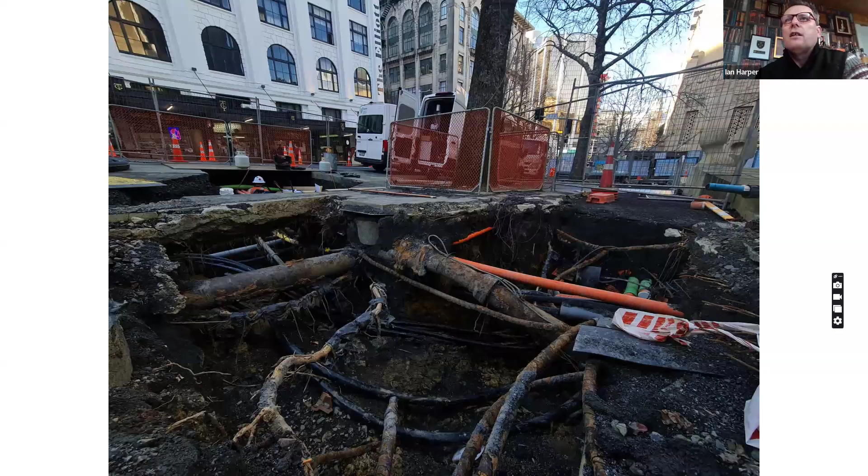So it's my favorite subject, and I did talk about this when I came over in October, but we want to talk a little bit more about it and a little bit more detail about underground services. It's the main job that I have in the UK. Most of my safety work is related to working around and near underground utilities and services in the UK. We have lots and lots of infrastructure that is under the ground, and it's increasingly difficult with the extra number of assets that we're putting into the ground to avoid them. And some can be extremely dangerous, such as electrical cables and high pressure gas, and cause lots of injuries. But also there's other services there that can cause just as much damage to other infrastructure and affect the quality of life of people in our cities, but also affect us commercially as well. So most of my work in the UK revolves around avoiding hitting and damaging underground services.

I think it's also important for you in Ukraine. I think as more assets are above ground, they could obviously be targeted and damaged, so it is important to ensure that they're safer underground. But we want to make sure that we don't damage services, because we want the utilities workers to be employed doing more productive work than repairing the damage that we're doing to underground pipes and cables ourselves when we carry out work. That's why I think that's an important subject.

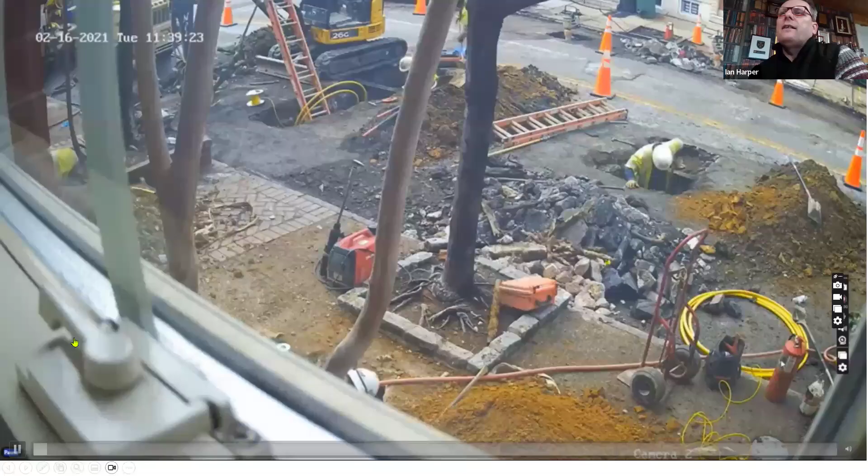I could show you lots of videos of people hitting underground electrical cables and people getting injured. I don't think there's any point in that. Some underground cables, underground services can cause injuries and burns, but often other service strikes can be just as damaging. So we have a short video here of a service strike, which doesn't look too dramatic to begin with, just someone digging a hole in the street.

You can see they've had some sort of incident, and it appears they've hit a water pipe. Very quickly it turns into an annoyance and becomes quite a significant incident. You can see the water coming up at various parts of the street. The worker looks quite angry, a little bit upset.

Not only do we have water that's going to flood some of the buildings close by, but it's also going to run down the street. I don't know what buildings might need to be evacuated, the costs involved, or the people relying on that water now. Maybe their taps don't work, or they don't have access to drinking water because we've damaged the pipe and it's becoming contaminated.

So it's not always about electrical cables and safety. There are other services that can cause damage as well.

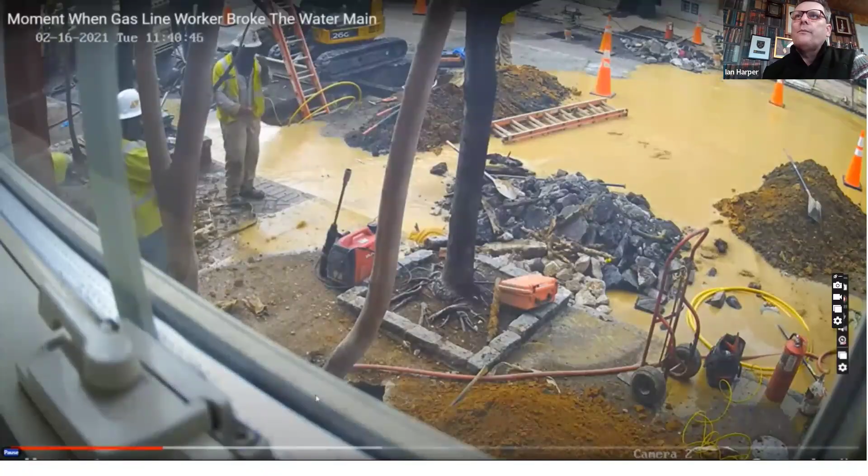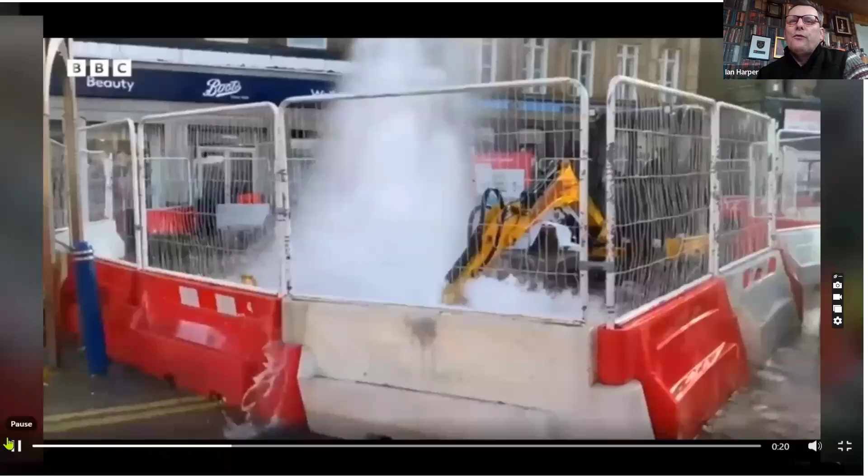This is one that happened close to me in the UK. You can see the amount of damage caused here, where we managed to flood a street. You can imagine all that drinking water is supposed to go to people's homes, but it's actually flowing down the street, and the amount of effort taken to make that water drinkable is wasted, as well as the damage it's causing.

It affects all the shops there, and those shops would probably close. It affects fire suppression systems, and even the ability of the fire brigade to fight fires, because the water pressure is adversely affected when we've hit the service and we're losing so much water.

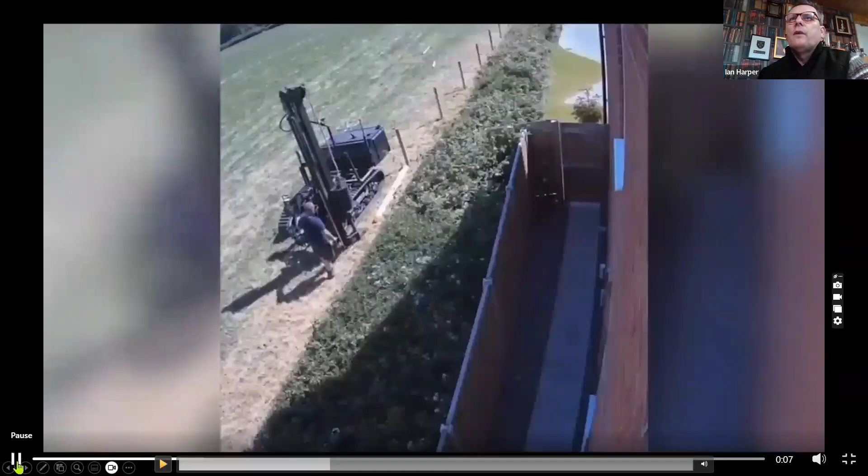This particular incident is quite a significant one that's just been prosecuted in the UK as well. A lot of people think this is about construction or building, but this is a farmer just putting a fence up in a field, and he manages to drive a wooden post through a high pressure gas pipeline.

That's quite a big explosion, and it required the evacuation of 30 houses. The emergency services and firefighters had to attend, and the whole village was left without any heating. Fortunately it was summer, so it wasn't a massive problem, but this was just a regular guy putting in some fence posts on his farm.

So it's not all about construction activities. It covers all types of industries. Anybody who does anything where you might put something into the ground can be affected.

From my perspective, working on behalf of development banks on occasion, when we hit services that has a massive impact on the sustainability goals I'm often talking about. These are the ones that are affected. If you damage services to a village, knock it off water, electricity, or heating, you have a negative effect on a lot of those sustainability goals.

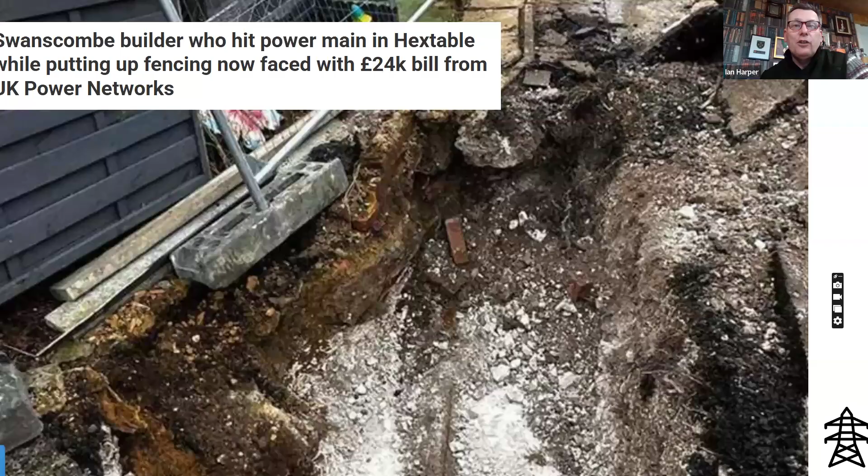So it affects everybody, whether you're doing big construction work or just small maintenance work on your property. Everyone potentially could hit an underground pipe or cable, such as this individual doing some work putting up fence posts. I don't even think this is a work activity - I think this is someone just on the edge of their property putting in a fence post.

So I quite like that, just the way he runs away, rather strangely. But notice it's not a big injury, a big incident, but it could have been a lot worse. Some fires and explosions from electrical discharges can be huge. And this guy's only wearing shorts and a t-shirt.

So in the UK, a lot of workers will wear special protective clothing when working around underground services to prevent people from getting burned if there is a bigger fire and explosion.

So what type of services are struck in the UK? Well, we get statistics in the UK of the number of utilities that are damaged every year. And by far the biggest amount of services that are damaged are underground gas pipes.

Now, the reason for that is generally because most of them are plastic. So later on, a lot of this presentation is going to be talking about how do we find these services, and plastic pipes are very, very difficult to find. So I think that's why most of them are hit.

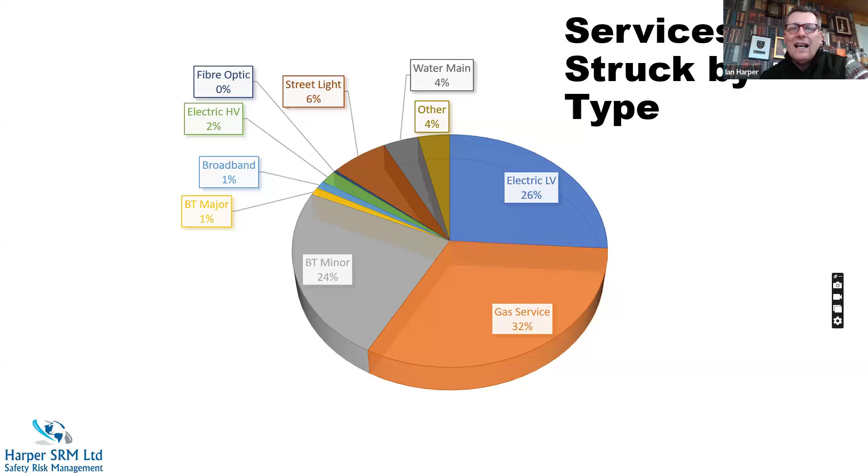So they've put it inside a duct to our properties. So we have a small plastic pipe that the fibre optic is installed to. So hopefully we can find that, but generally that service is very, very difficult to find and very poorly installed most of the time.

How are they damaged? Most of the time it's with an excavator or a machine. So excavators and machinery should not be used within 500 millimeters of a service. That's a rule we have in the UK. You find out where the underground pipe or cable is, and you don't put any machinery within 500 millimeters of that service. So that's one of the rules that we have, but often we don't know where they are, so we end up working too close to them and causing damage.

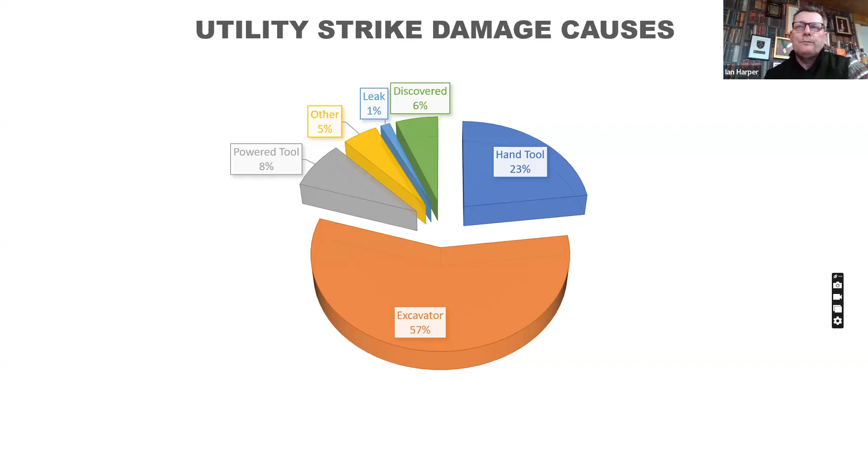And most of the time, we find that services that are damaged are not put in very well, and they're quite shallow, so they're not very deep into the ground. So, as I said, most services are damaged with less than 500 millimeters in the ground. So theoretically, we shouldn't be using powered hand tools or machinery when working near them. So that makes it really difficult if we're working in a high street environment. How do we then cut the concrete or asphalt above the cable to do some work on it?

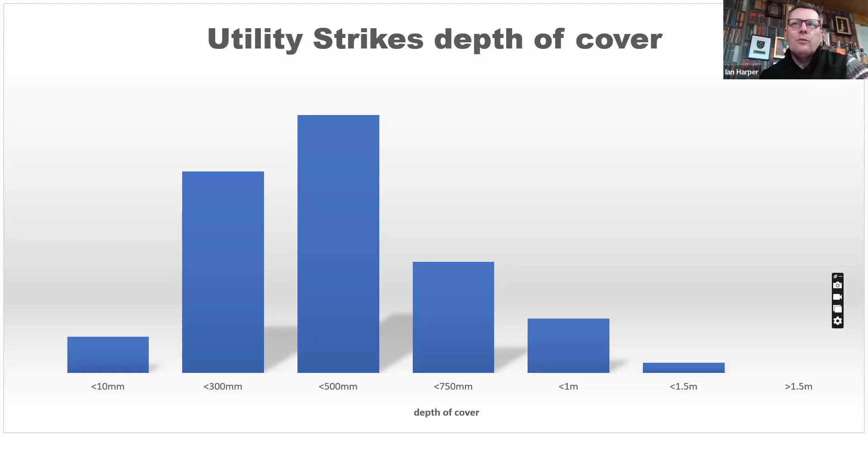And we have about 30,000 pipe and cable damage incidents every year in the UK. So we have lots of statistics. Some of these statistics are as follows.

Plans are available. So 86% of the time, people who hit services generally have drawings. So sometimes they don't. Now, in the UK and most of Europe, it is a requirement for whoever owns the pipe or cable to keep a record of where it is. So you should be able to go to the utility company, to the electric company or the gas company, and they should be able to tell you if there is a cable near where you are and provide a drawing.

In the UK, we have systems where we can do it within 4 or 5 minutes. If I get time at the end, I might show you how that actually works. So I can get any drawing for any utility in the UK within 3 or 4 minutes.

The same as in Australia - you just phone one government body and they source drawings and information on where services are if you're doing any work near them. So plans are available, but the next bullet point is plans reported as accurate is actually quite low. Often when we get drawings, they're not very good anyway, so they don't tell you what you need to know, so we don't rely on them.

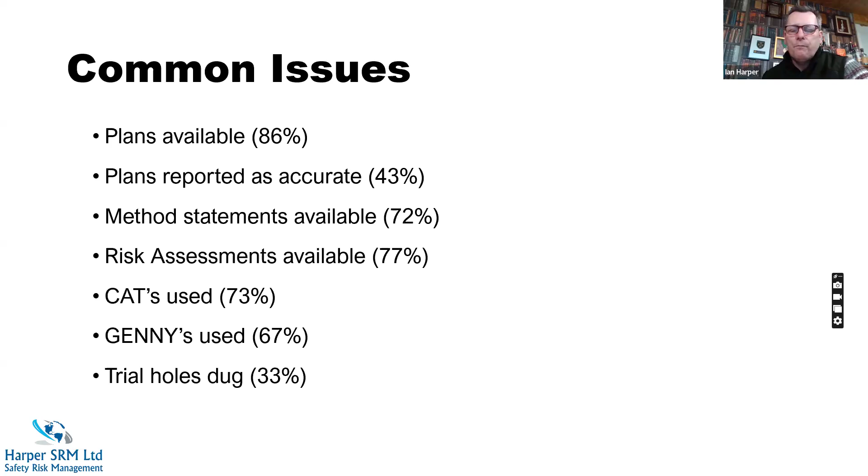Now, the UK's Health and Safety Executive do prosecute various companies when they damage underground pipes and cables, especially when people get injured. They also publish prosecutions on the HSE website - this is the labour inspector. And they give details. As a safety professional, I often look at these details because it gives me an idea of what the inspectors are looking for and the types of questions that they'll ask me if I'm involved in an accident. So this was a contractor called VolkerInfra.

They hit a cable with an excavator. It was a 275,000 volt electric cable, and the flash was so bright it burned the eye of the machine driver. He suffered blindness in one eye because of the intensity of the explosion. The company was prosecuted, and the labour inspector made this comment: the existing live cable had not been adequately identified by the team working on behalf of VolkerInfra, that's the contractor. And so the surface markings for the cable location were incorrect by around 50 centimeters. That's quite a big statement.

So in the UK, when I'm working with clients, that's the first question I ask them. I'll ask the question of you - if you're doing any work on your premises, do you know where the underground pipes and cables are? And are you more accurate than 50 centimeters? So in the UK, that's what the expectation would be. You find where the pipes and cables are, and I want to know where they are with an accuracy of 50 centimeters. So that's quite an important statement that now we have to follow in the UK.

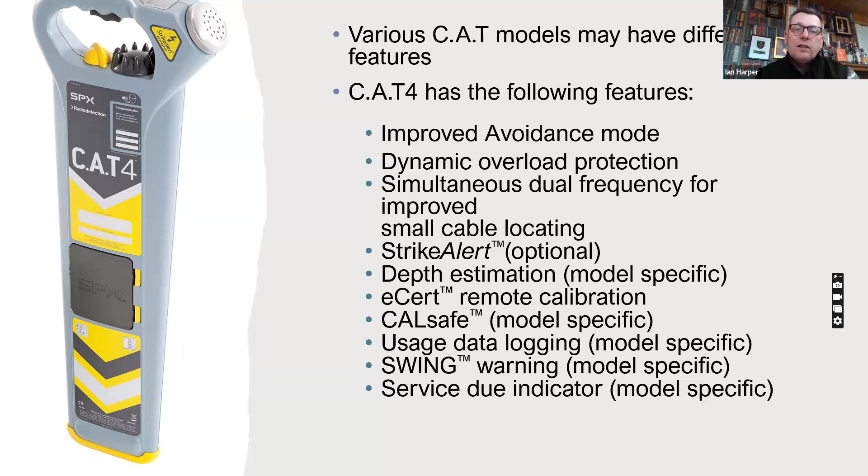The signal generator does something different—that sends out a specific frequency that's not used anywhere else. That frequency I can then put into a pipe or a cable, and then I can trace just that pipe and cable. So if you imagine in the street, there might be 3 or 4 different electricity cables and maybe 2 pipes, and it's really difficult to scan to work out which one is which and where they all are exactly. So if I use a signal generator, I can put a signal in each individual service one by one, and I can trace them accurately. I can work out the exact locations of each individual service, and I'll show you how that works.

Still with me? Okay, so if you imagine there's a pipe or cable in the ground, that's what it looks like, and this is the electromagnetic field that comes off the service. As the CAT moves into that field, it will start to make a noise, and there will be a visual display window which shows you how strong the signal is. As you come directly over the service, you'll reach a high point, and then as you move away, the signal will start to disappear.

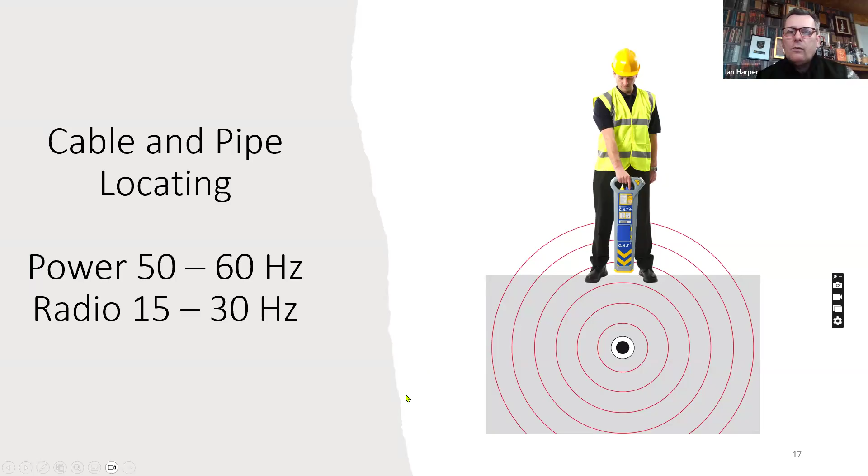So I've got a short video, and these are the videos that we use for training. I'll show you some of them to show you how it works. Now, I hope you can hear me talking on the video, so please tell me if you don't hear me talking, okay?

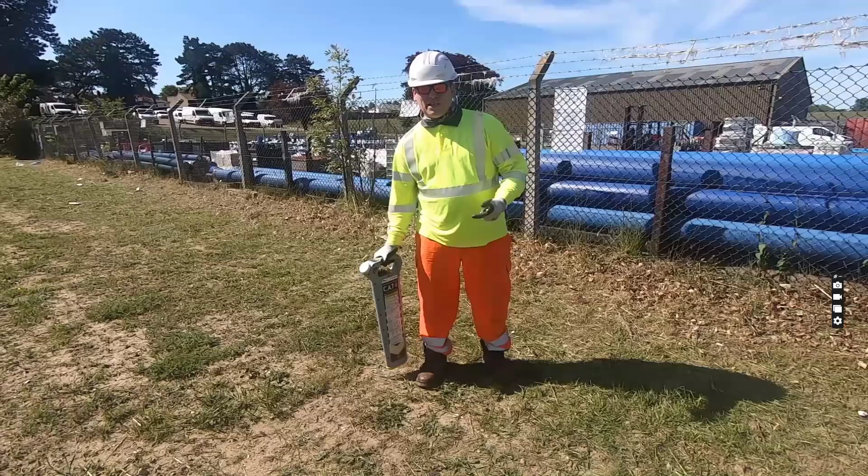With no electricity in it, we wouldn't pick up a signal. So if it was a metallic pipe, for argument's sake, the power mode would not pick that up. So I've now put the CAT in radio, and we'll try again. And you can hear a slightly different sound—that's a metallic object in the ground, and it's the same location as our electric cable, so it's probably that cable.

So it looks to be about at this location. Turn, signal loss, turn back again. So it looks to be about here. You can see they're relatively easy pieces of equipment to use. So that's in radio mode because we're looking for a cable, but there's no electricity going through the cable. So I think it's in that location there.

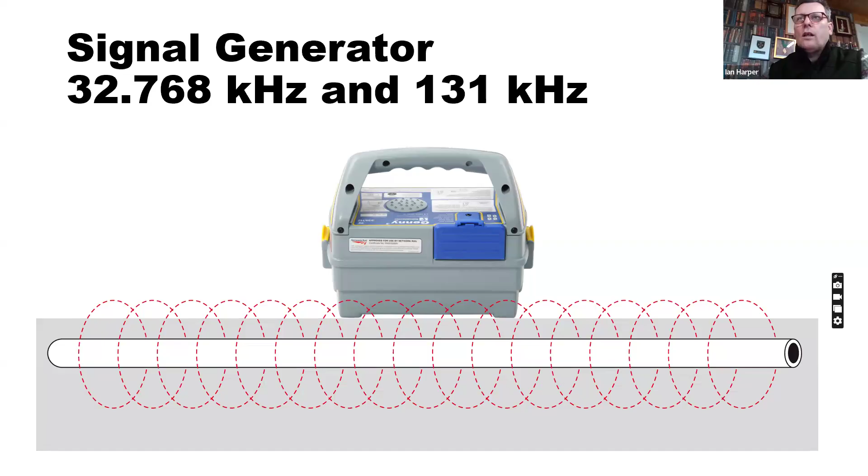What I want to do is try and accurately identify it. So the signal generator generates a 32 and 131 kilohertz signal. If I put that on the ground, it puts a signal in anything underneath it, so that means I can be more accurate with tracing the service. This is where the generator becomes more important. And the other thing I can do with the signal generator is work out the depth of a service as well, so I'll show you how that's used.

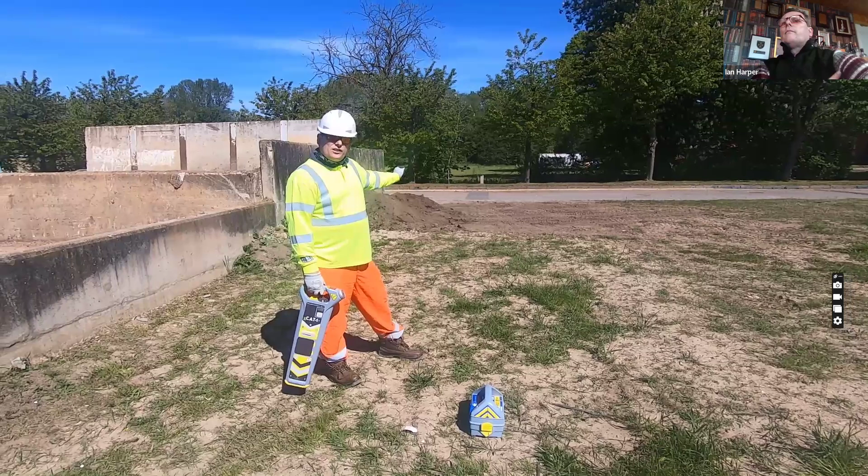So we know the electrical cable runs down to that scar in the road, but I've got to do some work on that road. So I really would like to know how deep that is before I start. To be accurate in my tracing, I need to attach the signal generator, which is down here. The cable doesn't appear anywhere above ground, so I'm going to have to try and identify its location.

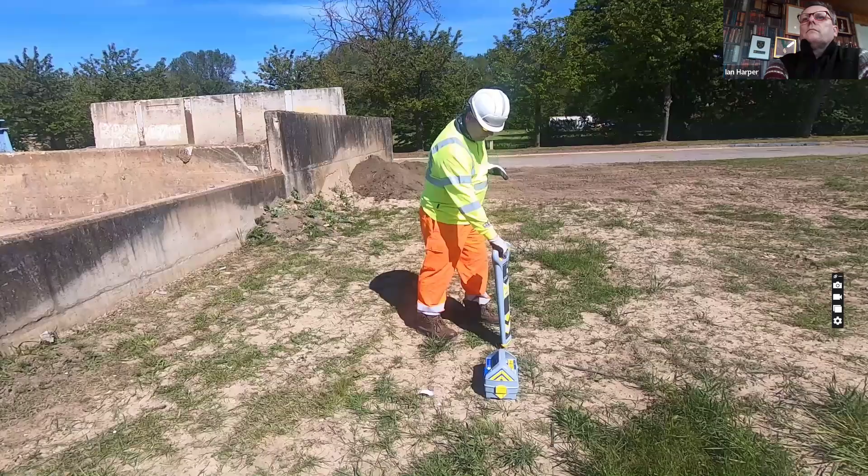Which appears to be around here. I'm going to turn the signal generator on. That's going to put a signal into the service under the ground, and then we're going to try and trace it down there.

So hopefully that makes sense to everybody. That's where I'm standing, where I think the cable goes. So I'll put the signal generator on top of it, which means I'm putting a specific signal into the cable under the ground. I think it goes under where this piece of road has been cut. So I want to know exactly where the cable is, and how deep it is, which is what we'll do in the next video.

So we picked up the electrical cable, we think, in this scar in the road, but I want to be more accurate and know the depth of the service. So we've set the signal generator up there. I've now put the cat in signal generator mode. We should pick up the signal that the signal generator is inducing into the power cable in this scar.

So I'm going to squeeze the trigger. Just before I go on, if you're wearing headphones, this makes a really high-pitched noise in a second, so you might need to turn the volume down. Just giving you a bit of a warning, okay?

Trouble is, that's the signal directly from the signal generator, so I need to dial that out a little bit by adjusting the sensitivity down. So it's just altered to signal loss - it's right on the edge of signal. As I move forward, I'll start to get a signal, and I'll need to turn it down a little bit. Once we get to full power, we'll reduce the sensitivity a little.

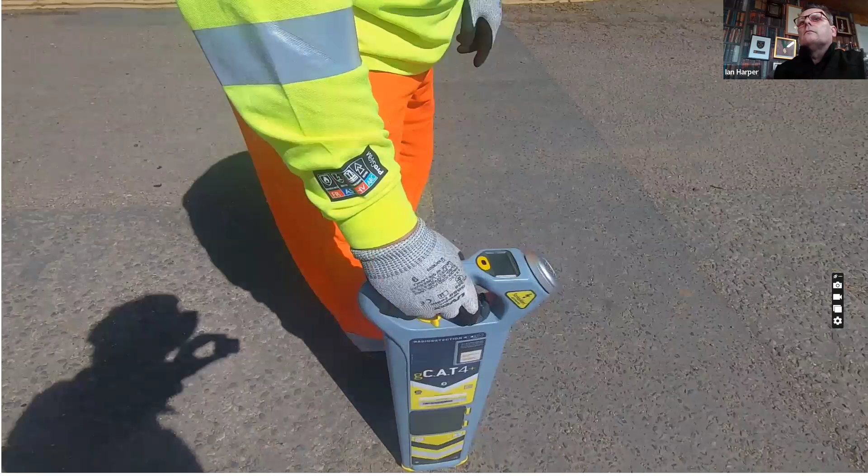Hopefully you can see in the window, there's a little bar that goes up and down, so I can be really super accurate on finding out where that service is. I am really, really confident that there is an electrical cable underneath the middle of this scar in the road. These are really, really good pieces of equipment to use to identify where the service is.

Now, I did say most services are hit at 500 mil of depth. So the next thing I need to know is how deep it is. This particular cat does measure depths as well, so I'll show you how that works.

Okay, so I've taped up the speaker so it doesn't distract us from the sounds that are going on. As I locate the service again, first thing before doing the depth measurement, we need to make sure we are over the strongest part of the signal, which it appears to be. Need to make sure that the blade of the cat is actually on the ground and it's level.

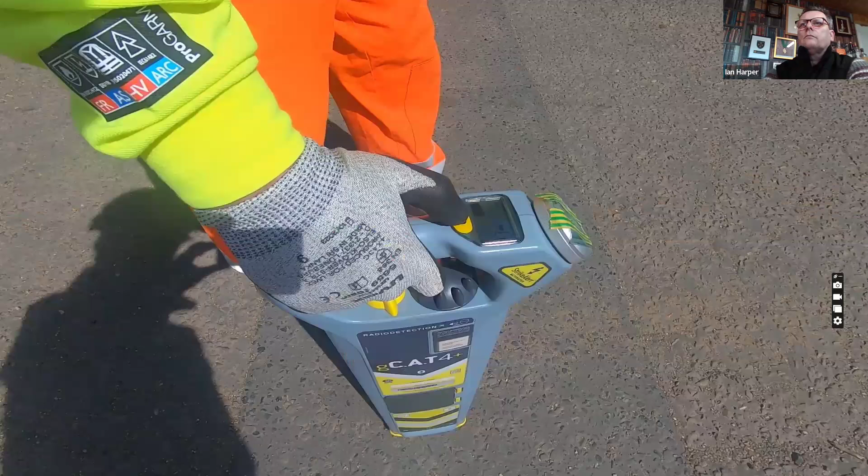So I'm going to press this button and it's giving me a reading of 0.97. Now you want to do several of these along the area that we're actually scanning, so I'm going to do another one - just coming over a little bit further. Locate the service again, that's the strongest part of the signal. And depth: 0.97. So hopefully we can build up a consistent picture of the depth, and hopefully that'll give us some more confidence.

So if you remember, I said in the UK we can't put a powered hand tool or a machine within 500 mil of a service. So now I know it's nearly a meter deep, I know I can use a machine on top of the service because I know it's a meter away. Obviously, there's more to it than this because it gets more complicated the more services there are.

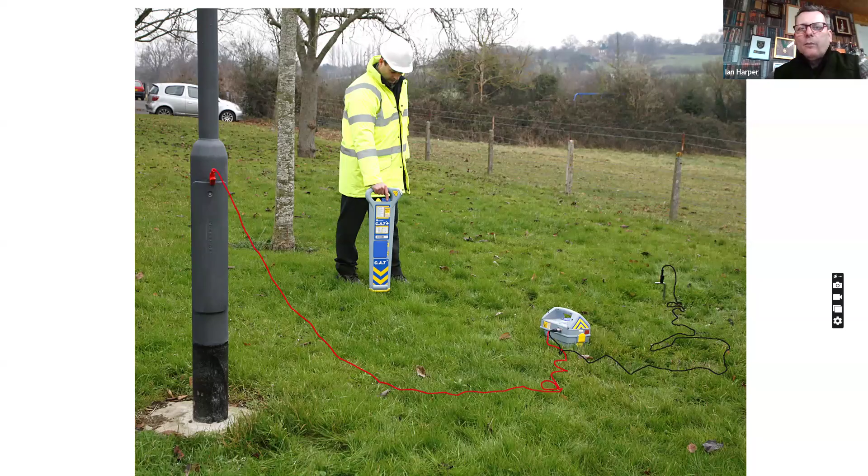There's different ways of identifying services and their depths as well. Now, if there's more than one service, I could put a signal into just the one pipe or cable. In this case, we're trying to trace a streetlight cable. During the day, the streetlight won't be on, so there'll be no electricity in the cable, so they're notoriously difficult to find. But I can use the signal generator in a different mode, and I can ensure the signal only goes into that streetlight cable, so even though there might be lots of other cables in the same area, I know I'm tracing just the streetlight cable.

And there's a different connection as well, which just does the same thing, but in a different way. So I've got lots of opportunities to survey, to pick out individual cables and pipes, to make sure I trace just that individual pipe and cable and determine its depth. That way I can then make a decision on what to do next.

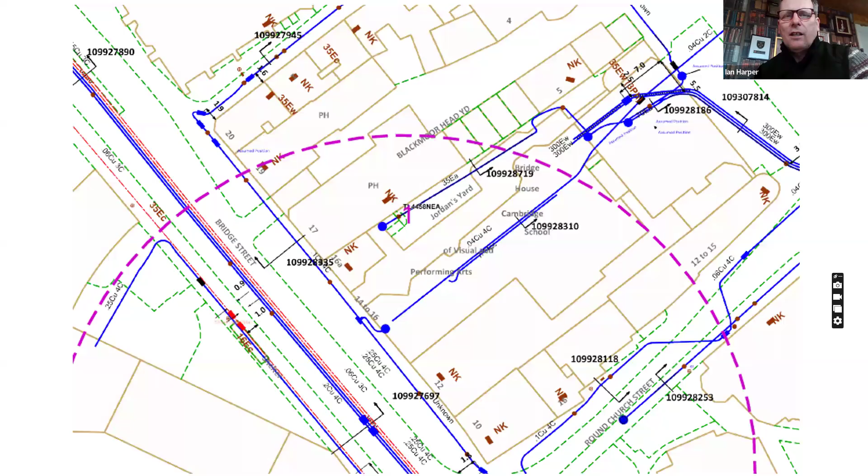So where cables don't go anywhere, the cat cannot pick it up. So cats don't pick up cables that don't go to anything - it has to be a cable that goes to something. So this particular cable that goes past where it says performing arts, the cable avoidance tool won't find that. It needs to be connected to something to create a circuit, not just finishing in the ground.

The other thing cats don't pick up is loops. So I'd be able to find this cable, but part of the cable is looped round - I wouldn't be able to find that with the cat because it distorts the signal. So there's different things that I have to be aware of when I'm using the cable avoidance tool.

Now in the UK, if we have a plastic pipe, sometimes we put a metal wire on top of the pipe. If there's a metal wire on top of the plastic pipe, then I can find it. So that's how we make it easier for people to find services.

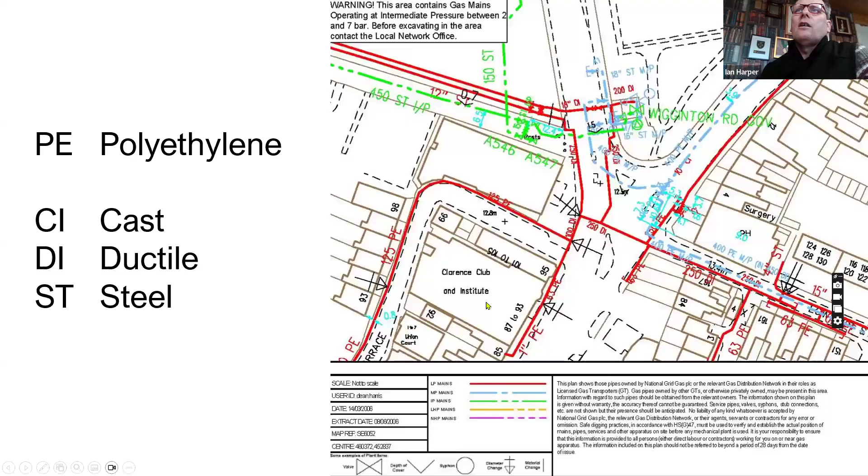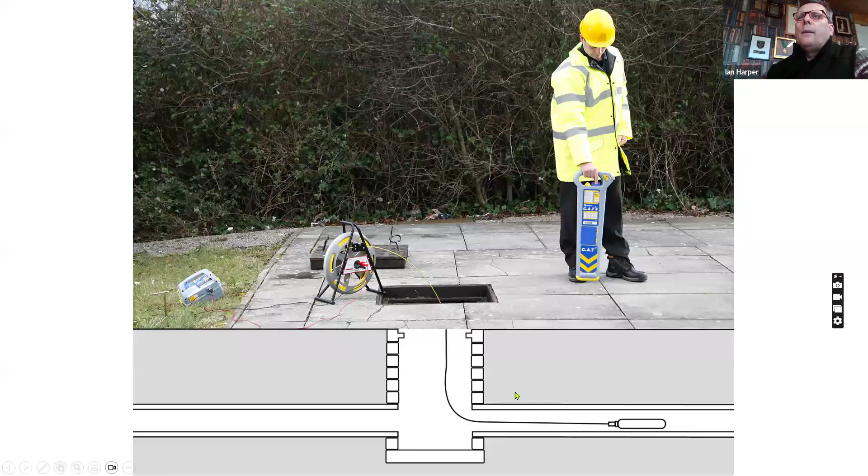But if I can gain access to the pipe, I can use a device called a sonde. A sonde is a wire that I can push into the pipe, and if I can push the wire in, then I can find it. So we use this in the UK to find drains, sewers, and ducts - where you've got a duct for cables, we can track them accurately as well.

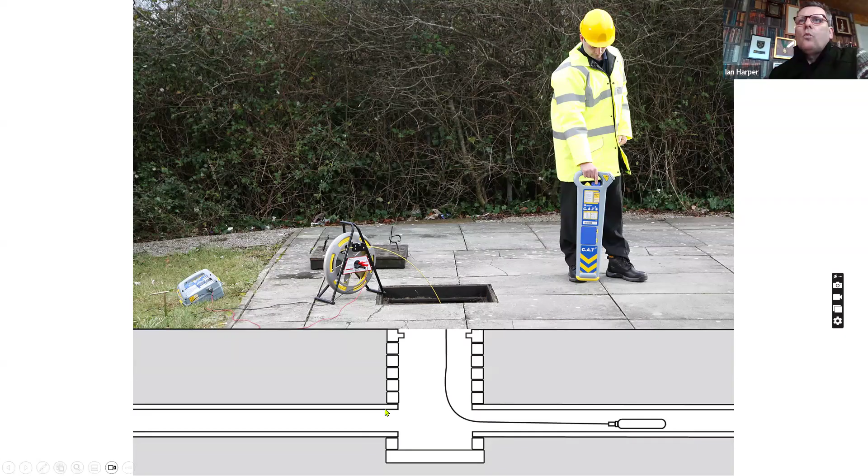Okay, so I can find most things apart from plastic pipes with this type of equipment. And once they've been detected, then we mark them up on the ground.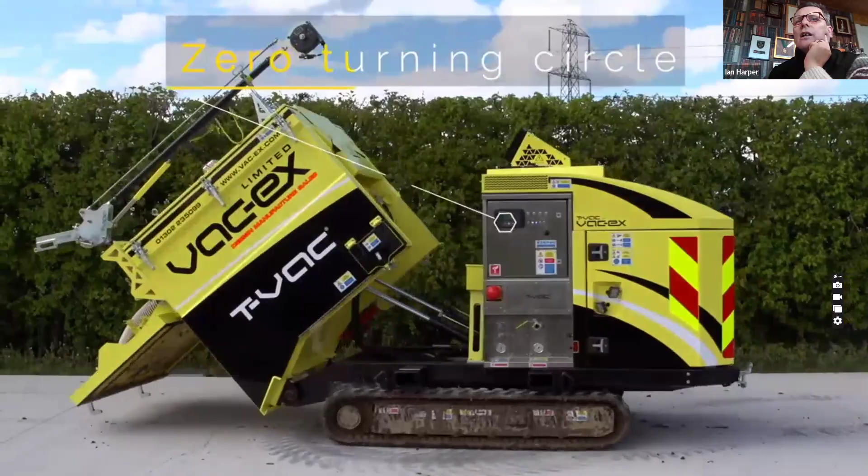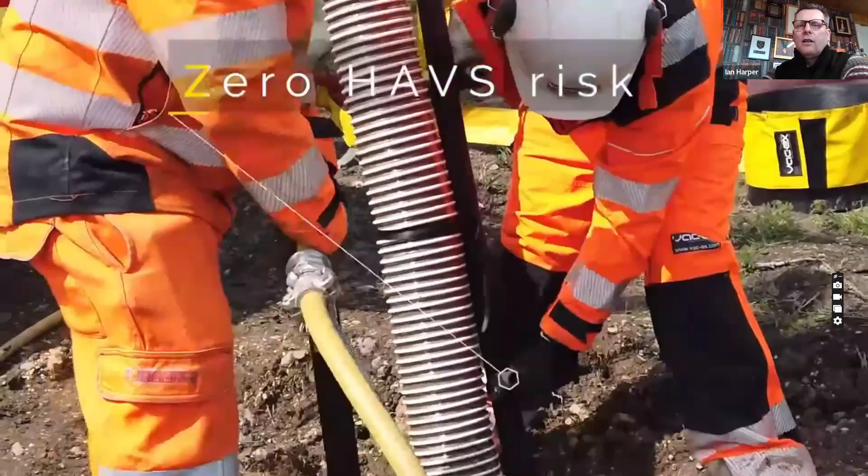A lot of services in the UK now, when we dig around services, we use vacuum excavation. We don't tend to use machinery. If the ground conditions are good enough, we'll take one of these machines to the site, which sucks the soil out from around the services. We've had a massive reduction in damage to underground pipes and cables in the UK. We just use an air lance that sucks the soil out of the ground around the pipe or cable, then tip it and move it away somewhere else. It's a really, really safe technique to use.

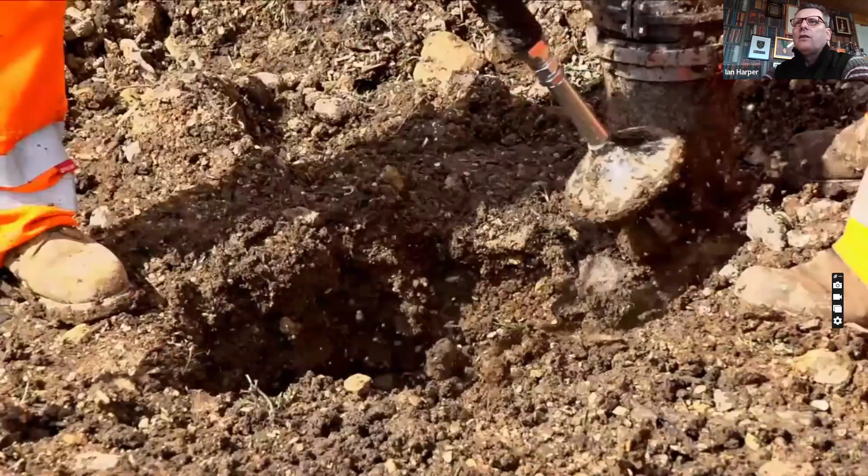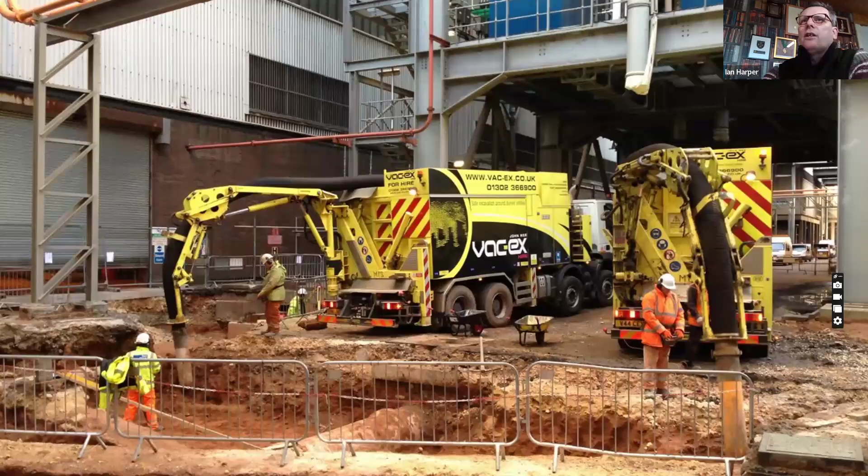I wanted to show the video because the guy who manufactures these has got lots of different types as well, so there's another day if you're interested in this equipment to see more of it. There are ones which are relatively small tracked machines, and ones that are big lorry-mounted things. Initially when they started, they were just lorries used to clean out drains. I don't know, you must have lorries in Ukraine that suck debris material out of drains alongside the road, maybe. That's all these machines are, but they've been refined a little.

There are different ways we can use to dig around services, and they're very, very quick and efficient, much quicker than people digging with hand tools, shovels and spades. We find them really most efficient.

All work is carried out under permits. The permits we have in place check that we've seen the drawings, and that the drawings have been checked, so we know where the services are. A CAT scan has been carried out, and there are marks on the ground showing people where services are before they start work. We have permit systems like this in place, so we check all the correct steps are undertaken before we move to do any work. That way we ensure we're in the safest possible position before we actually start the work activity.

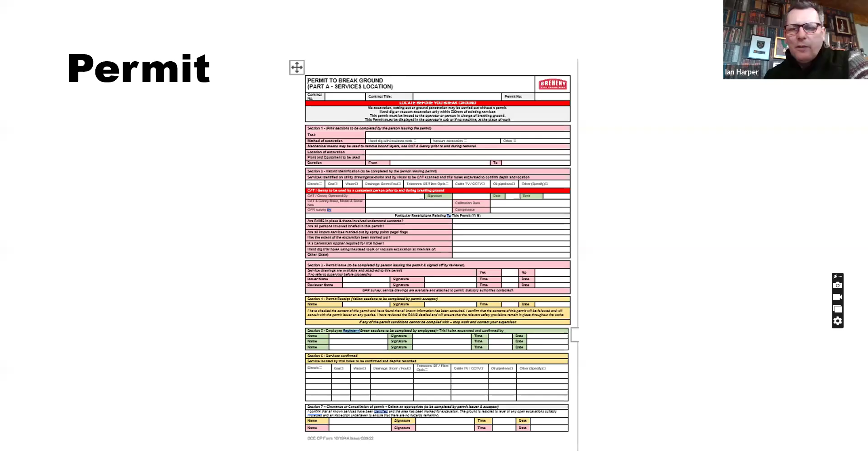Okay, I'm conscious—how much time have I got, Olga? I've been talking nearly three quarters of an hour now, haven't I? Just conscious of time. I'll keep going, it's okay. Yeah, okay, yes please. Dear colleagues, just write your questions in chat. Okay, probably, I'll be brief.

I've only got a couple more slides to go through. The reason I wanted to do this particular presentation is because this is going to be the source of our next trip to Ukraine, hopefully in a couple of months' time. We have a number of sets of cable avoidance tools that we can bring with us next time. We did bring two, so we can come back and bring some more equipment to carry out this type of activity. I'm interested whether you'd like having some of this equipment and whether you think that'll be beneficial and of use to you. Our intention is to come, deliver the equipment, and give much more detailed training about how to use and operate it to be able to survey for underground services.

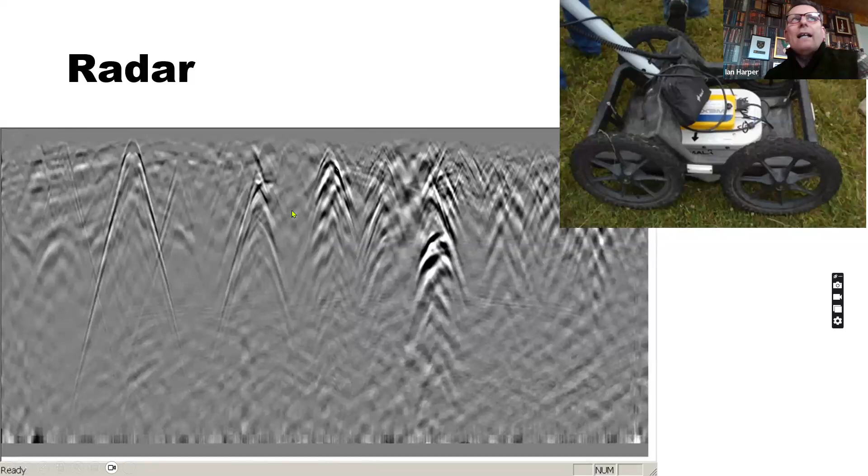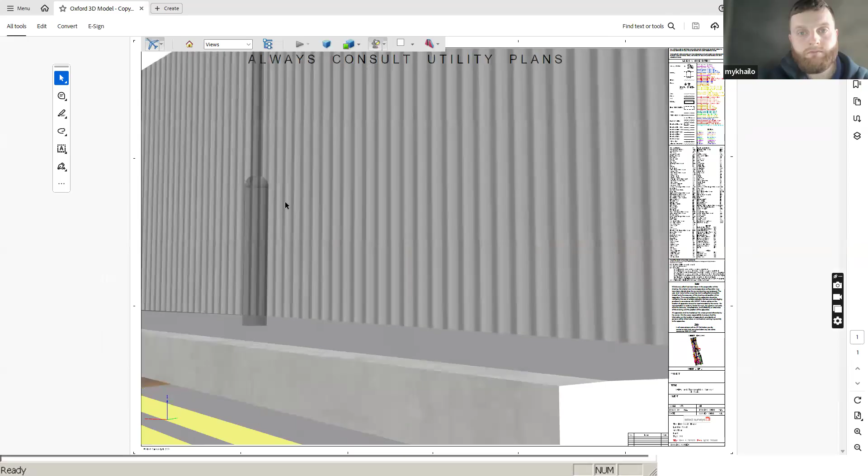With technology, hopefully you can see something different on my screen now. This is an underground 3D model of some services at a traffic point in the UK, where I can show you a 3D model that you can walk around.

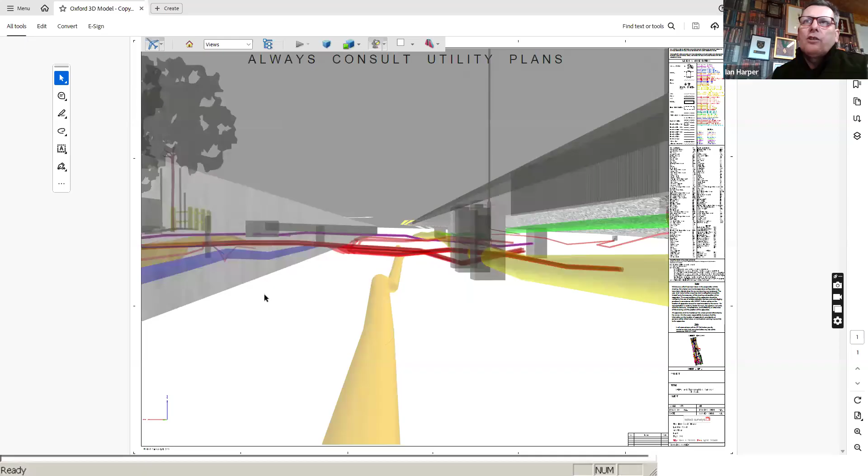Demi can create digital twins of projects of underground and above ground assets, that's what his thing is. He's very much into technology, carrying out surveys, which is really useful because he does it on some projects, and I can transport you anywhere in the world and see a project without having to travel there. So in this particular area, you can now go underneath the road and see where all those pipes and cables are. There's much more technology in what Demi wants to discuss in his presentation.

That's all I wanted to talk about today, just to give you an idea of what the equipment is that we intend to bring on our next trip. I'm interested in getting your views and opinions about whether we should, or what else we could do to help support our next trip. Is that okay for everybody?

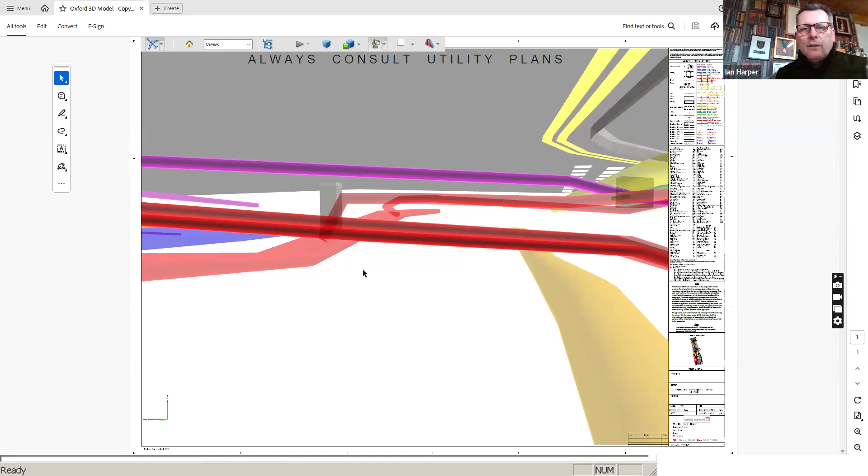Yeah, thank you very much. Impressive as usual. One more question, so first of all, thank you. Your equipment, of course, I'm sure is kept by Lviv University. The question is roughly how much does it cost, and what should we think about, how should we calibrate it or certify it, or just what requirements for users.

Thank you. We think 15 sets, which will all be calibrated, and they can be calibrated just by plugging them into a computer and connecting them to the internet - they self-calibrate themselves. There is a supplier in Kyiv, but as far as I know, he hasn't sold any yet, so that's something we need to discuss, Olga, because we need to speak to him. He's quite keen to support it because I don't think anyone in Ukraine has this equipment. So once you do, I think what he'll probably do is offer to sell you a more expensive one for trading in the old one.

So it gets you started. These pieces of equipment are around $1,000 each if you buy them, so that's quite expensive to buy, but this is a start, and this is a training and learning aid. We can put you in connection with a person who can service and maintain them, but really, you just plug them into the internet and they service and calibrate themselves. So that can be done remotely. Thank you very much.